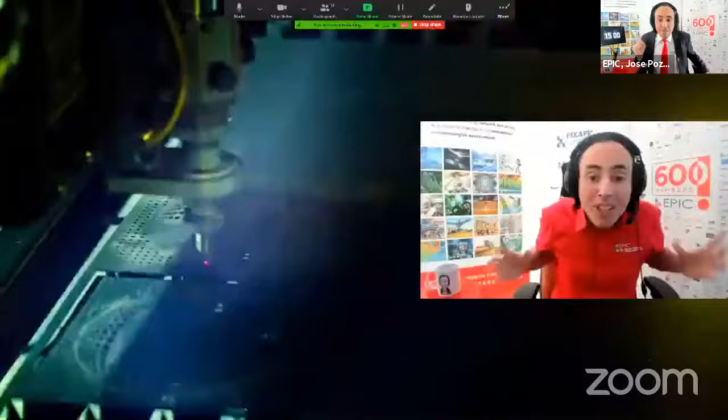Wow, that's the only way to describe why ultrafast lasers are getting such huge traction across a growing number of important applications. An initial boom in biotechnology and micromachining caught the eye of the full industry. Now femtosecond, picosecond, and nanosecond lasers are established as stable, mature, and reliable, offering high quality and quantity.

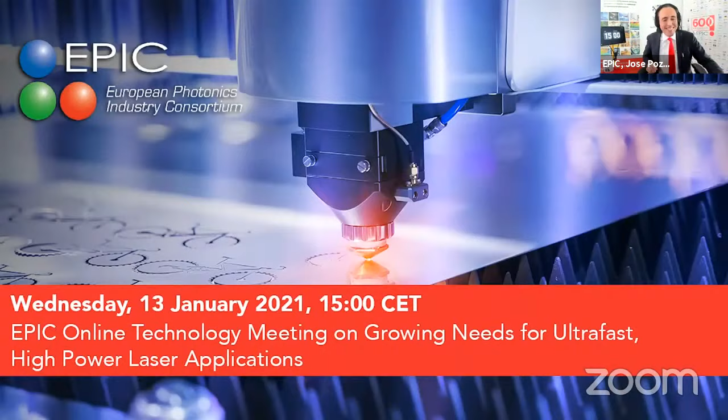But this meeting is not a technology push. I want to hear about real-world applications. My VIP list on January 13th looks like the credits on an epic motion picture.

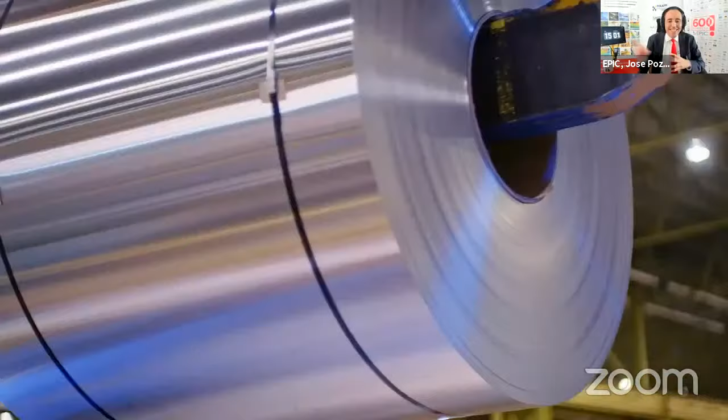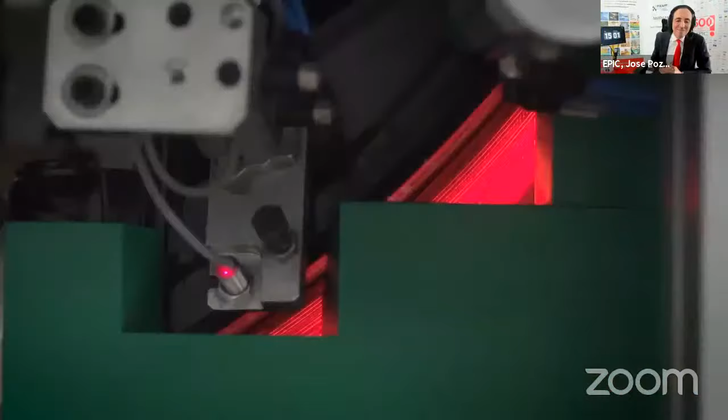Look at the big players like the Finnish Outokumpu, the masters of stainless steel. Others like Marelli are making and delivering next generation automotive lighting. And I'm sure that, like me, you are curious about what famous names like Ferrari, Maserati, or Lamborghini are doing in the field of advanced laser manufacturing.

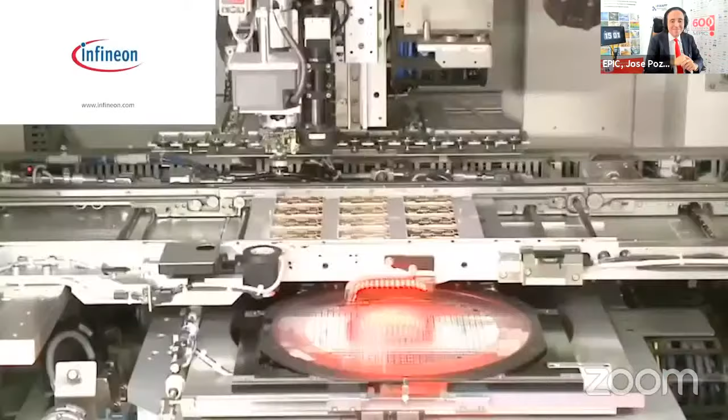What about semiconductor companies like Infineon, consumer goods manufacturers like Bosch or Huawei, leading optics companies like Leica or Zeiss? They all need and want customized ultrafast lasers. So let's discover the pulse duration, frequency, and beam shape specifications that match their needs.

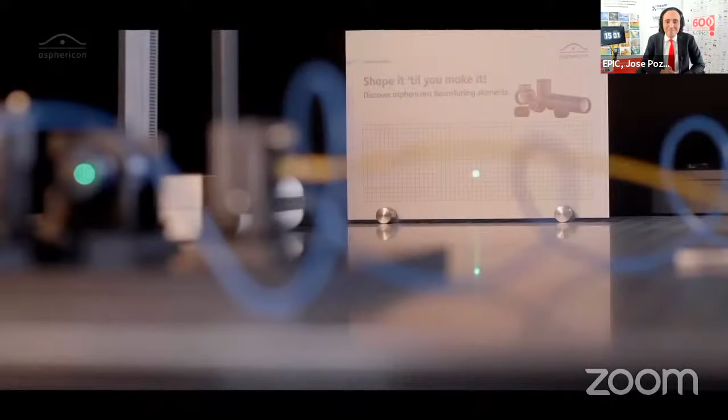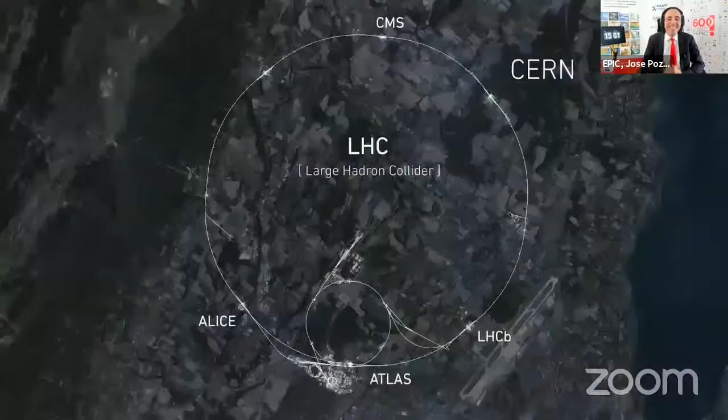And looking beyond material processing, remember the Large Hadron Collider at CERN depends on femtosecond lasers to maintain synchronization across the entire macro system. So plenty of reasons to put Wednesday, January 13th, 2021 at the top of your New Year agenda. Join in the conversations with leading experts.

Now, we want to use laser to apply a texture on the surface. We have been looking together with the University of Twente in the Netherlands on creating these kind of dimple patterns

on zinc-coated steel using nanosecond and picosecond lasers. In the next step, we have also looked with one of you on larger size samples, such that we can really demonstrate internally, but also to other people, the functional surface properties which we can realize by using this technology.

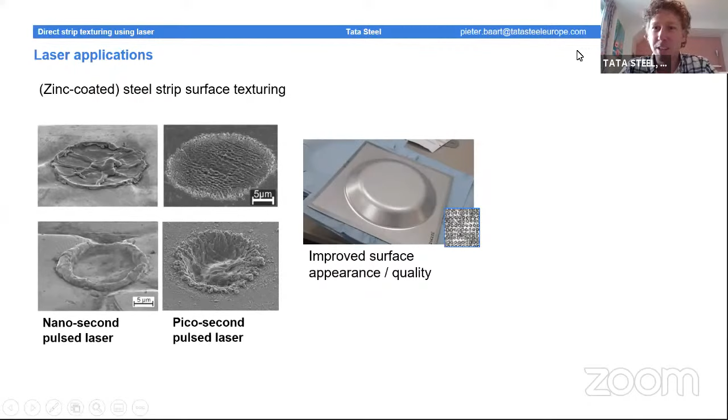And then in the next step, we have also done some tests where we created tailored surface textures, as we call it, where you don't texture the whole steel plate with the same type of texture, but you can really optimize locally to, for example, drawing process customers.

So this is all great, but how do we do it today? Maybe it's good to give you an idea of the starting point.

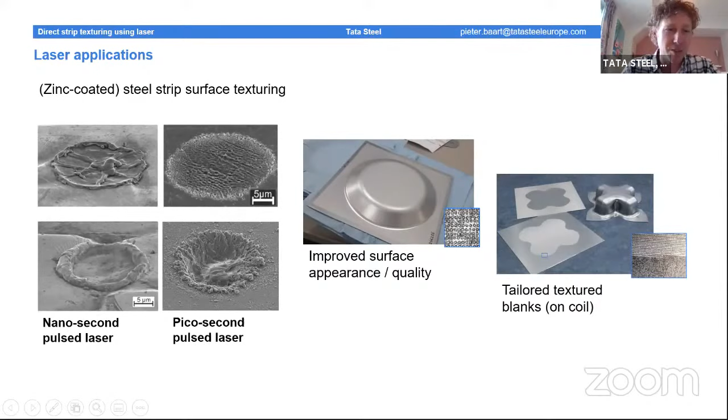In this production line, there are a few steps. There is a heat treatment section, there is a galvanizing section, and there is a surface finishing section, which mainly consists of the temper mill. And this is what I want to look into.

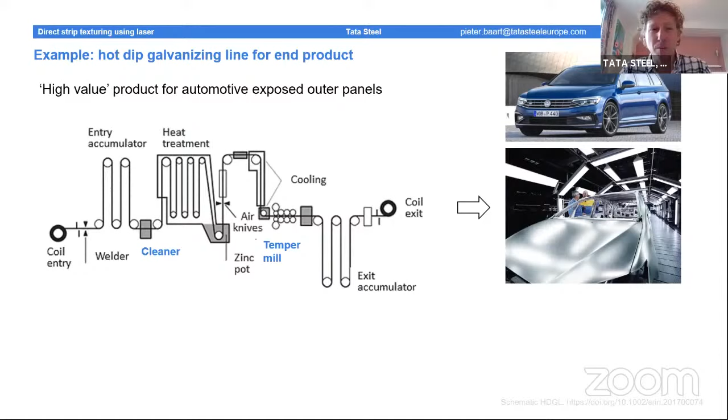This temper mill, which we use today, has a number of objectives. First of all, to improve the mechanical properties of the steel itself. It does some shape control, but for us most important, it creates the strip surface texture. So it basically copies and presses it into the steel strip, which is flying through at a speed of 2.5 meters per second.

My ambition is to realize a process where we split the mill step for the mechanical properties and the surface texturing by doing that with laser. So this is not something we can do today.

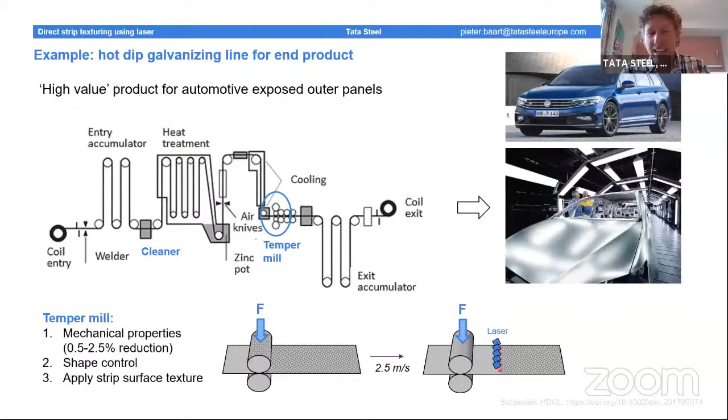This is quite challenging. I have identified a number of challenges which I want to share with you. That includes, first of all, the process speed itself. If you look at the beam delivery, the beam which is scanning over the surface, depending on the pulse duration we use, we are limited in the beam velocity.

At the moment, I'm mainly looking at nanosecond pulse duration. And then you have to remember the speed at which the strip is also going is quite substantial, 2.5 meters per second. So that means with one single laser beam, you will see a kind of drift in the surface, and you really need a number of laser beams to create a full coverage of the surface at these kind of beam speeds.

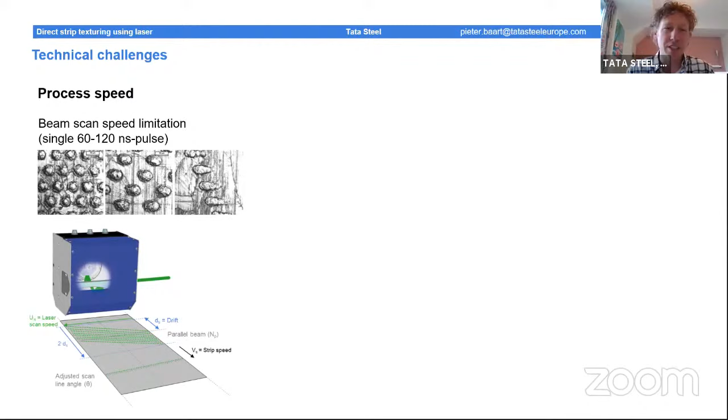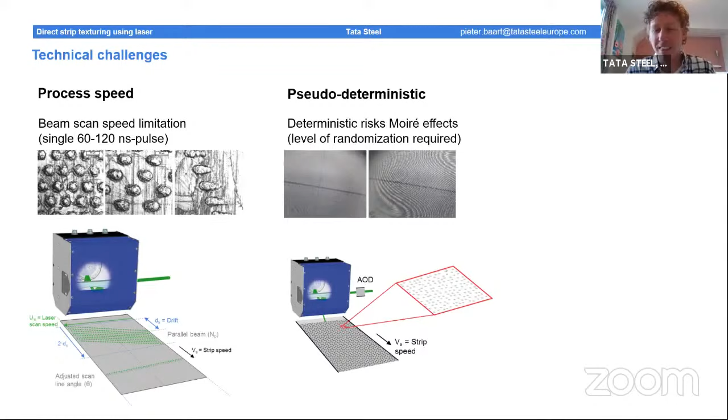And then the most challenging thing will definitely be the system integration. I have done some calculations on what we need to apply this technology in our hot dip galvanizing line. Well, we need about 380 kilowatt pulse laser output power. That's amazing. At the same time, we need 2,000 to 3,000 parallel laser beams to cover the top and bottom side of the steel strip, which is about 1.5 to 2 meters wide, moving at a velocity of 2.5 meters per second. So that's really an ambitious target, which we definitely cannot do in one step.

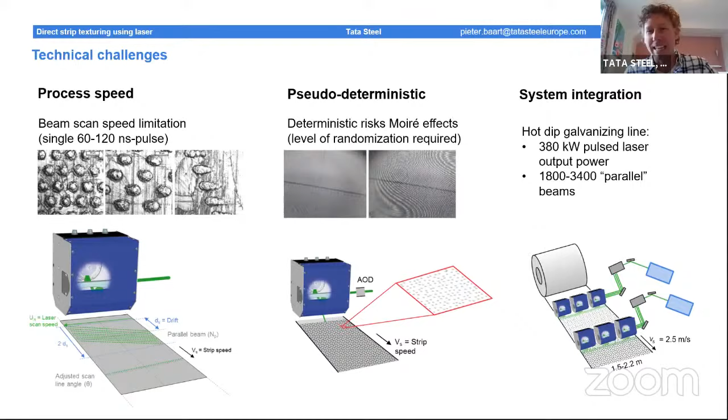So that's why I created a kind of roadmap.

Today we are in a situation where, in a lab environment, we have realized strip properties. We have looked at the feasibility, where the state of the technology is now, and what steps are required to go to hot dip galvanizing line type applications. But in the short term, I see a kind of single blank approach.

So we have a kind of batch production technology where we have square meters on which we can apply texture, locally optimized textures to support the deep drawing processes of our customers as well. And then in the medium term, we can do this in a continuous process, in a full coil, but at a rather low speed, with a dedicated line to do this.

And then in the long term, we get back to our hot dip galvanizing line speed of meters per second. So we need to process about 4 square meters of strip per second with the laser. But that will definitely not be today, not tomorrow. It will take a couple of years, and I really hope you can support me in realizing this. So that's what I wanted to show to you today.

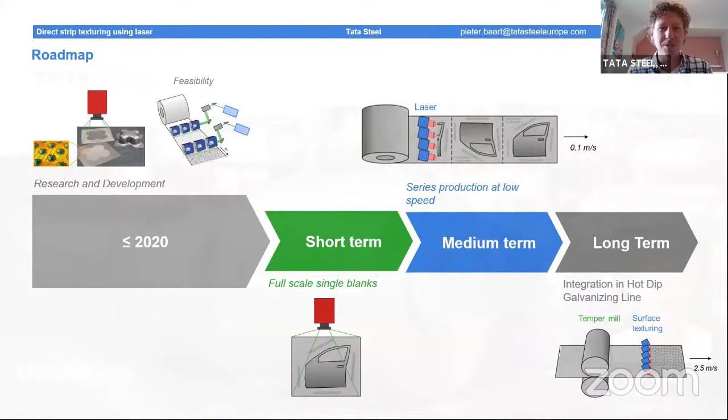Thanks a lot, Pieter, thanks for being here today and bringing your wish list. When we had our first discussion, I was saying, wow, this is really a wish list, a special one for EPIC members, not so present here. It's really nice to look at the future. So Pieter today really presented something that can't be done today, but maybe in a while. So everyone, think about it.

If there are questions for Pieter - you mentioned it a bit already, you didn't summarize it all together, but basically we always ask what can you do for them and what can they do for you. You are looking for something on large surfaces, many beams, high power. You mentioned the nanosecond laser, we had a chat about it, it could also be picosecond, but that would be even more demanding. If someone wants to comment, feel free.

I see a hand raised already by NTS Optel. If you can ask your question live, switch on your microphone. Hi Pieter, it's Frank. What can the laser do, in your opinion, that you cannot do today? You have that roller already, so why do you want to switch to this huge laser system? The benefit is not clear to me.

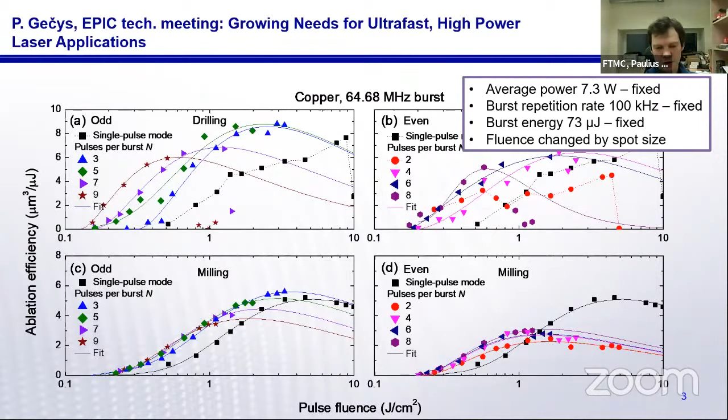What's most important is that if you work in this optimized regime at an optimal fluence level, you have the highest efficiency, meaning the highest material removal rate in cubic millimeters per joule per minute per watt, and also the highest surface quality. This is really important, and our lab spends a lot of time researching these mechanisms.

Here are some efficiencies we reached for copper and stainless steel. For crater drilling, some efficiencies are higher compared to milling of cavities. For example, the highest efficiency we reached today was 8.8 cubic micrometers per microjoule for copper drilling in a megahertz burst with 3 pulses.

In the case of copper cavity milling, we reached a bit lower efficiencies, but they are still higher compared to single pulse conventional milling. What I can say is these milling efficiencies are world record top efficiencies, because we tried to optimize these burst regimes together with fluence optimization, giving the best possible results.

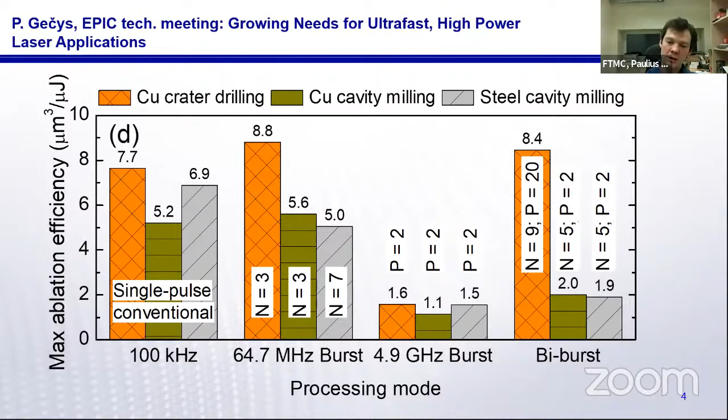So we apply this. You see some pictures of our milled features in copper and stainless steel, fine features, which is what our lab is developing. If you need process development or some advice, you can always contact me. Thank you.

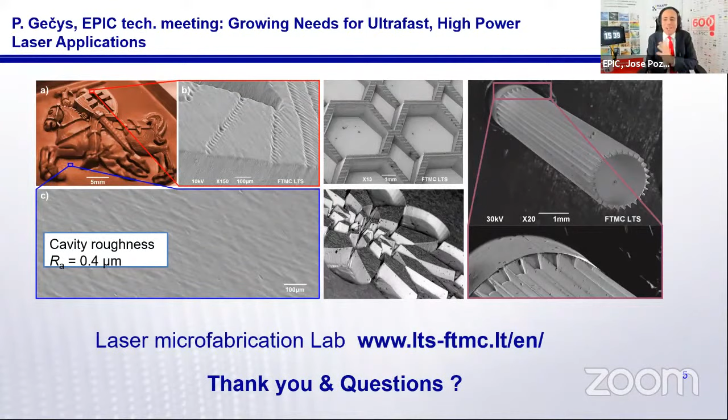Thank you very much, Paulius. Thank you for being in this meeting. I have actually seen the Laser Microfabrication Lab in Vilnius when I was traveling 200 days a year, and I loved it. It's an experience that I recommend to everyone. Paulius, this is an epic meeting, and you know what that means: there are 650 companies that want to work with you.

What can you do for them, and what can they do for you? What collaboration opportunities do you expect after this? Yeah, so actually we do process development.

So if you have some applications where you need to test, we have lasers, we have our instruments. We can do some R&D research for you if you are interested in such things.

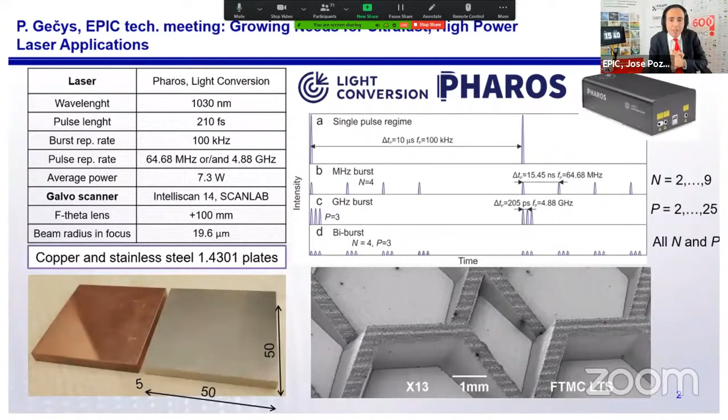Paulius, you mentioned some interesting lasers from Light Conversion, which I'm actually a fan of, and I would like to also give them a shout out. Really great femtosecond laser regime. I want to ask you about laser pulse characterization. There are many femtosecond laser companies today in the room and others, and we want to compare apples with apples. How do you currently measure the pulse shape?

We are more like a laser application lab. So you know, the characterization magic is for the laser manufacturer.

You know the magic of these meetings? I have everyone in the room, so I can go to APE. Do I have anybody from APE? These fantastic autocorrelators. When I do this, everybody knows APE. Mateusz, Ibek from APE, how are you doing this afternoon? Thank you. Yes, I think here you are.

I am very interested in knowing if there is a standard process to characterize the pulse shape in these femtosecond lasers. I know APE has developed the autocorrelator that everybody is using, and I love using it. How do you address this challenge? I think the most common and most used method is autocorrelation. We get roughly the pulse duration of a pulse. There are more sophisticated methods such as FROG or SPIDER, where you can really measure the real pulse duration. And I think those are the most common methods used in R&D or in monitoring of laser pulses.

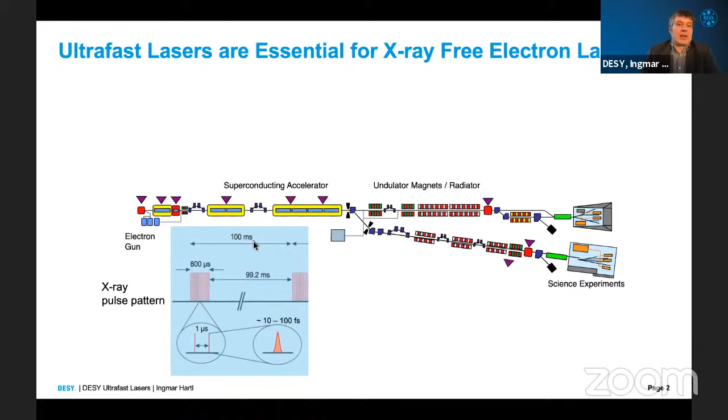We need UV lasers for generating the electrons. We need to modulate these lasers, and we need tunable UV lasers to modulate them again, to seed them. We need very flexible lasers which we need to reconfigure for every user, from the VUV to the terahertz, for pump probe experiments which are femtosecond timed to the X-rays.

So we have a huge timing distribution system on length stabilized fibers, which does precise femtosecond level timing of all these lasers to the X-rays.

Our facility runs 24/7, so we need high reliability. We typically have more than 99% availability of all lasers during the more than 6,000 hours we run per year. We have up to 5 kilowatt in these burst laser systems driving the conversions.

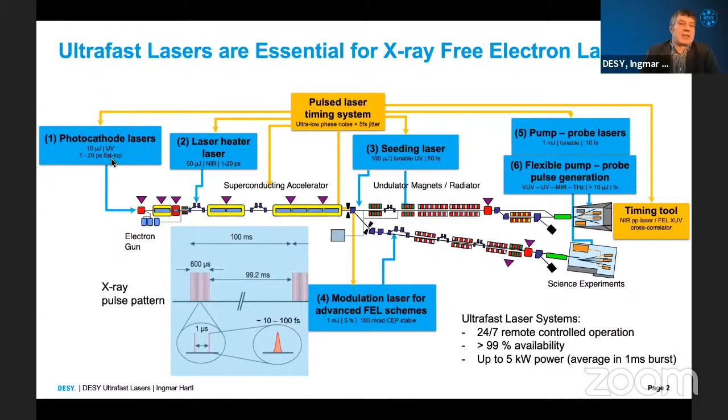I just want to show you one example, because that's why I came to this meeting. For this photocathode laser, we need flat top pulses, and we use industrial wave shapers to generate this.

What I show here at the bottom is we're also working on next generation accelerators. These are laser-driven accelerators, for which we need kilohertz rep-rate lasers with a few joules and a few tens of femtoseconds - kilowatt level, few joule laser sources. We currently have a huge program developing these lasers.

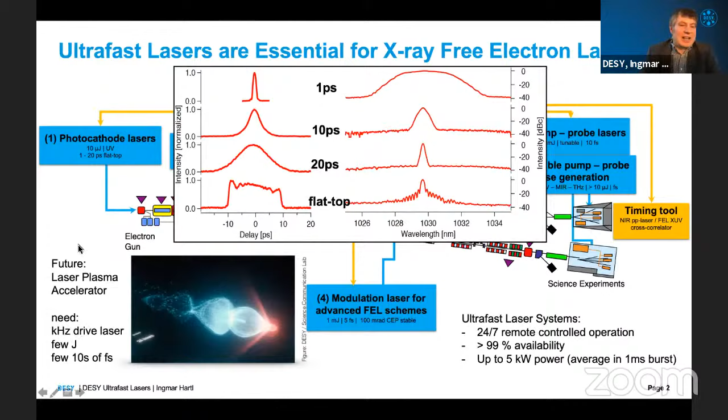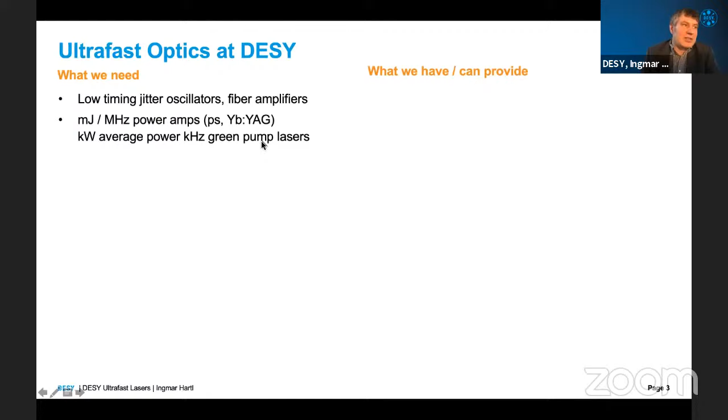So next slide is the epic question: what do we need? What do we have? We need oscillators, fiber amplifiers, ytterbium YAG, but also 2 micron and kilowatt average green pump lasers for electron acceleration, wavelength conversion schemes, PM fibers, fiber components, fiber Bragg gratings, pulse shaping technology - not only temporal but also spatial - drift stabilization for drifts in energy, pointing, timing, you name it. We need to be very precise.

We need to have high damage threshold optics, which are typically dispersion engineered, typically in vacuum, which makes it even harder, and mainly for our lasers in the NIR. But our main problem are UV and mid-infrared coatings, which are hard to get. We need high damage threshold components, and isolators and shutters are a huge problem.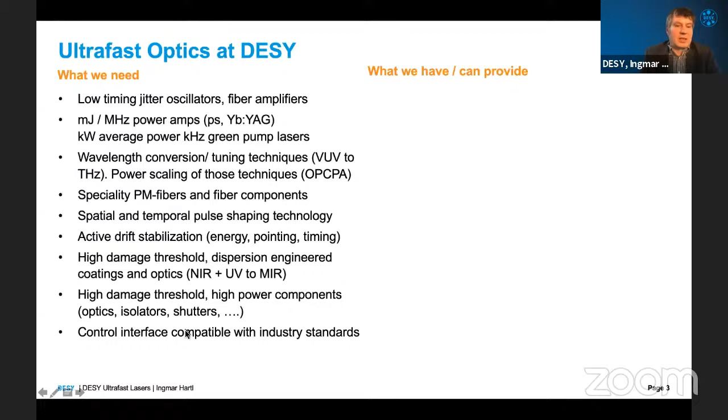We need control interfaces compatible with industry standards. We run remote controlled 24/7, so it's very important that our control software can interface to lasers and all diagnostics. We need high uptime, so we need to have maintenance by in-house staff and diagnostics.

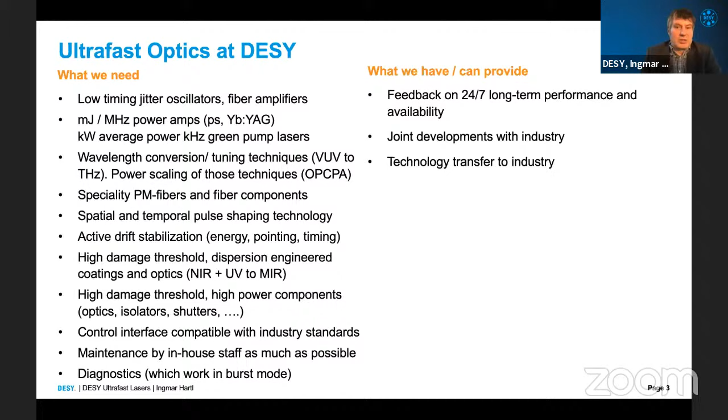So what can we provide? We can give you feedback on how the lasers are doing. We can jointly develop things - if we can't buy it, we develop our own stuff. Technology transfer to industry can be done, and we can provide you with excellent staff. For example, Francesca was at DESY, right? So we have super people here who are looking for jobs, and they have hands-on experience.

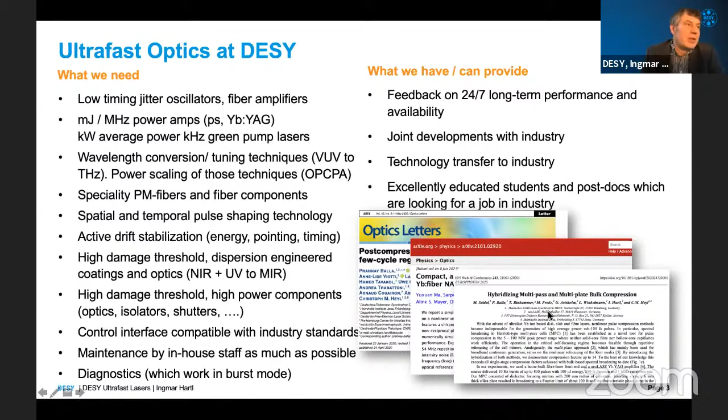I'll show you a few examples. We developed pulse compression schemes. We developed recently low noise oscillators - this is a joint project with a company, Neolase, where we did a new compression technique for picosecond lasers. And we have lots of electronics, and we have precisely timed laser systems. And for this, we have even an industry collaboration lab.

Plus, we have spin-offs. There are two laser companies founded by DESY people, which are on DESY campus and trying to sell this. This was technology developed at DESY coming out of these accelerator-driven things.

And I want to give you an outlook. The city of Hamburg is basically improving this entire area where we are located, so we will have more science, more industry, and more spin-offs here in Hamburg. Thanks.

So I guess Jose is close to cry - such a shopping list is like a dream for an EPIC meeting. So thanks really a lot for this presentation, and also for naming myself as ex-DESY. So thank you, now I don't know where to start.

I see some hands raised, some questions I want to ask. I don't know, so let's start with just laser components - I know that we have a slide there, and she wants to talk about what can be done with optics for high power lasers, right?

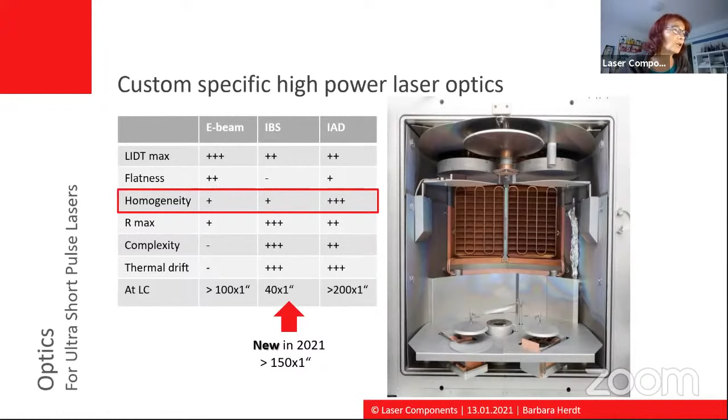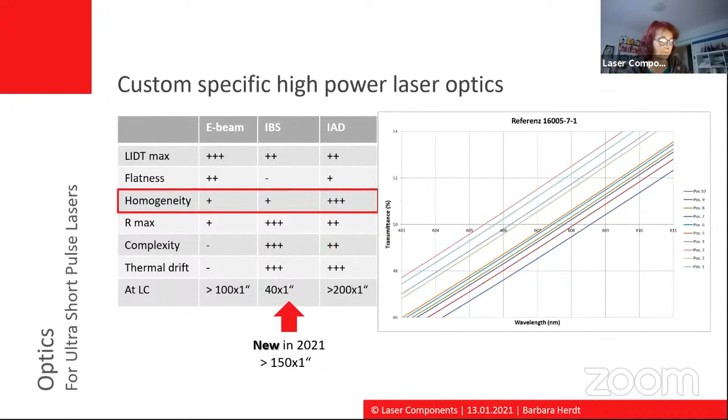So this is the chamber that we have bought, and it's specifically made to have good homogeneity, because that's another topic, to get good homogeneity on large optics. And so how do we measure it? We do a special coating on the filter, and we look specifically at the slope here and see that we get, for example, less than 1% in differences. So this is really something we developed for this customer, for this petawatt laser application, and we delivered many optics now, and I think we are very open for new projects, and this is what we can do for you.

Very good, thanks a lot. So I guess we have to move on because we have so many questions. I know that Ralf from Finisar doesn't have only a question, but he can show you what he did for Ingmar, and this can also be done for you as well, right? So Finisar are now II-VI. Ralph, maybe you can share your screen. Now we can - so this one, we remove this one. And now Ralph, are you there? Yes, I see you, welcome. So you are already a big buddy of Ingmar, right? Let's find you some new friends here as well.

Yes, thank you very much for giving me the chance to quickly talk about our activities. I would like to pick up on the WaveShaper, which Ingmar has mentioned. So the II-VI WaveShaper is a programmable optical filter. It comes in a benchtop box like this, or also in a module which you can integrate in laser systems. The type of applications we follow with this wave shaper include shaping of femto and picosecond pulses, shaping pulses in the time domain.

So we can do, for example, pulse compression, pulse stretching. We can create special pulses like double pulses or rectangular pulses. Other applications are spectral broadening of a laser line by applying an M-shaped filter, and also we can create wavelength tunable pulsed lasers. So these types of applications can be addressed with this programmable filter, which is based on liquid crystal technology - it's a spatial light modulator. That technology is broadly used in telecom applications.

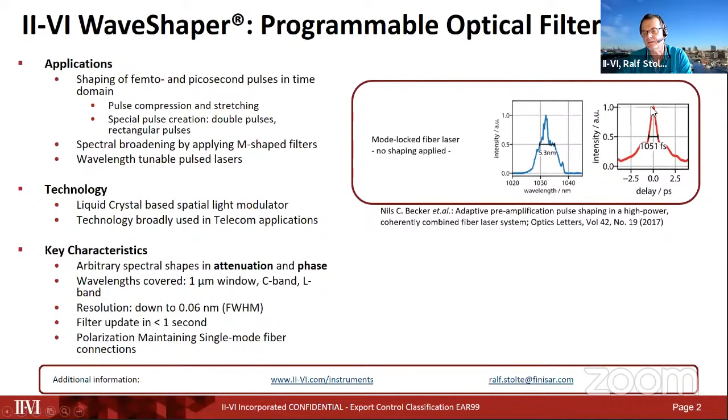So now to give you a better idea what you can achieve, I have an example here. This example shows the spectrum of a mode-locked fiber laser where we do not apply our shaping, no filtering applied. This mode-locked fiber laser has a pulse length of about 1 picosecond. Now with applying the proper filtering with the wave shaper, we first apply an M-shaped filter so that we suppress this single narrow peak, so that in total we get a wider spectrum of 8 nanometers instead of 5 nanometers. We also apply some phase function - this green phase function causes a flattening of the phase. As a result, we get a very clean pulse of only 300 femtoseconds instead of 1000 femtoseconds.

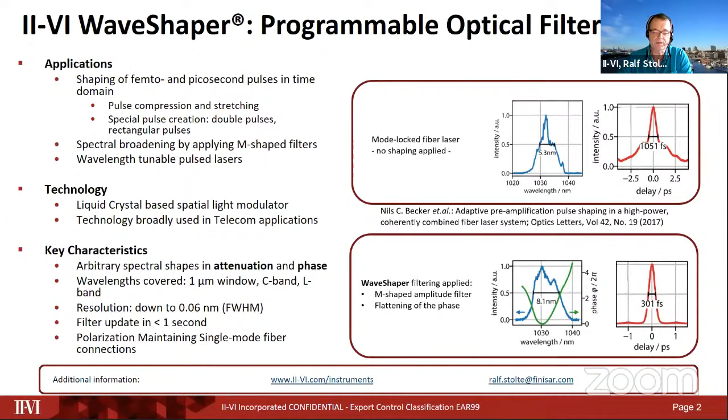So this is just one example. This is programmable from any computing environment, so you can just run your own filter shapes the way you like.

Very good, Ralph. I was muted. Sorry, sometimes I make that mistake too. Thanks a lot, Ralf, for this, his example is always helping. So if you get a 3 times better pulse, of course, that's the right place to put your WaveShaper.

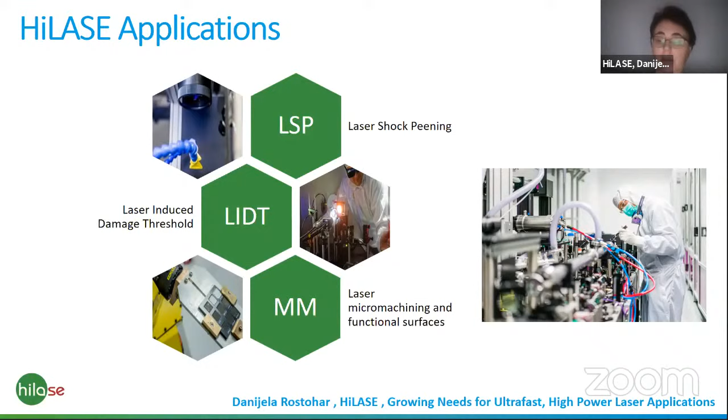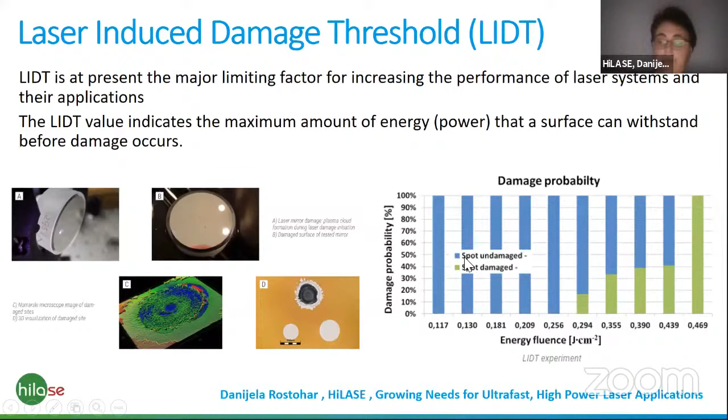Damage of the optics is given by the so-called LIDT value. Basically, you will get some kind of graph showing the damage probability for certain fluence. And we say that we are safe in this blue region. But if we go a little bit more back to the physics, fluence is related between energy per pulse and spot size. That means you can basically work in two regimes to get the same fluence: by low energy per pulse and small spot, or high energy per pulse and big spot.

That means if you are looking for optics and somebody tests your optics in this first regime, and you're going to use it in another regime, like the second one, you will see a huge difference. Your optics is going to be damaged at much lower fluencies. That means it's very important that you do testing in this second regime.

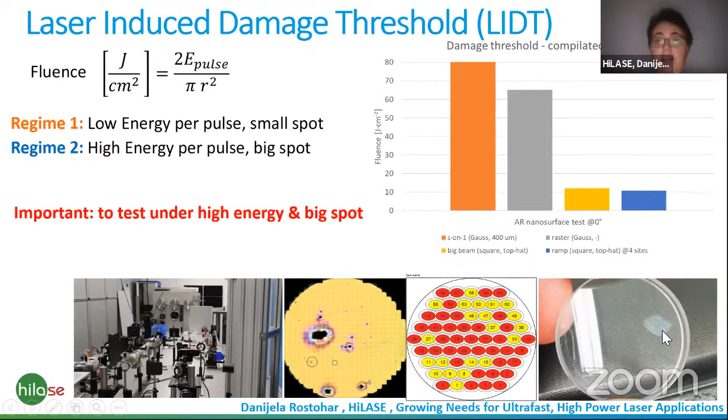Down here you have just a few pictures. This is our setup, this is how the testing usually looks, and some surprise, you see the damage on your optics, which was tested and supposed to work for you.

And coming to the favorite question, what can we do? In order to test our optics, we started LIDT, and now we can offer it as a service as well. That means we can do standard ISO testing on different sizes of samples, up to 1.5 kilos in weight. We also test in different conditions - I saw that today was interesting in the vacuum. We also very soon will have testing in cryo temperatures.

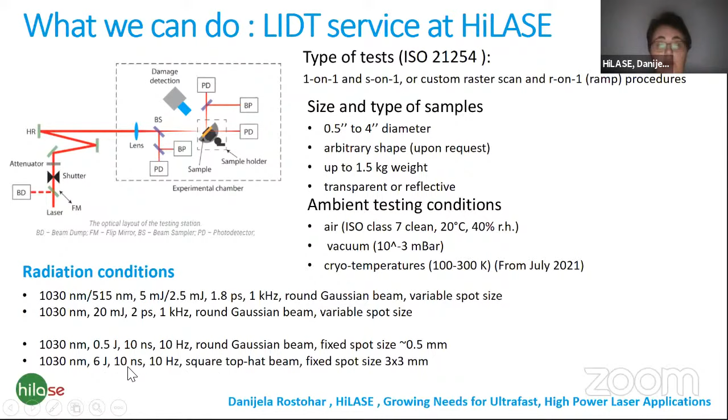And the second question, what you can do for us - helping us reduce the cost in optics and coatings, and also helping us reduce the waste of time. That means you can jointly work with us in understanding which kind of defects are influencing LIDT. Then also jointly develop new coatings and do analysis, and of course test your optics in these specific kinds of regimes.

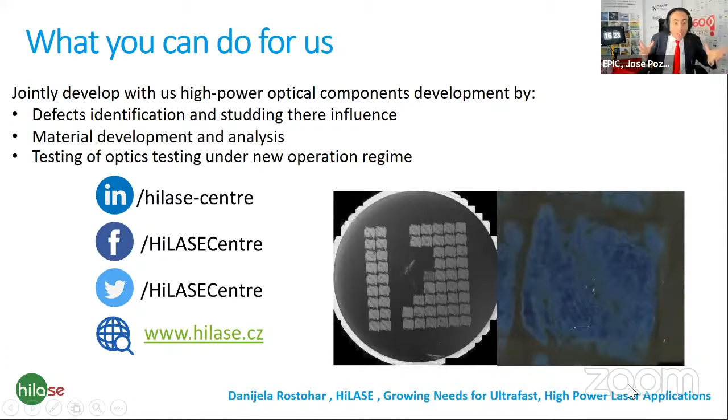Thank you very much, Danijela, for once again a great presentation and also always looking to collaborate. I have to say that so many companies are following up on different introductions that we are making to HiLASE, and I keep getting great feedback from collaborating with HiLASE. So congratulations on the great job that you are doing.

I would like to ask always companies who can interact with HiLASE when it comes to measuring the LIDT. So let's go to a company in the optics domain. Let me think, Asphericon. Do we have anybody from Asphericon? I think we do.

Sabrina, I don't think I met you before, but Sabrina, thank you very much for being at this meeting. One question - we are talking here about potential collaboration for the measurement of the laser-induced damage threshold. How does Asphericon deal with this? And is there perhaps some room for cooperation?

I already put a note down for myself that this is something so important, and it's always recalled from customers that they want to know exactly the laser damage threshold. We don't measure this in-house because we don't have the option to measure this. We don't have all the lasers, but we can do optics for high power laser applications, and we can do coatings.

And I already put a note down, Danijela, that my coworker who would be responsible for your territory should get in contact with you again, so that we can find a good way of cooperation, because you offered that you can do the laser damage thresholds as well. So we could do a cooperation in that way, that you do the laser damage threshold measurements and we do the coatings and do the optic developments.

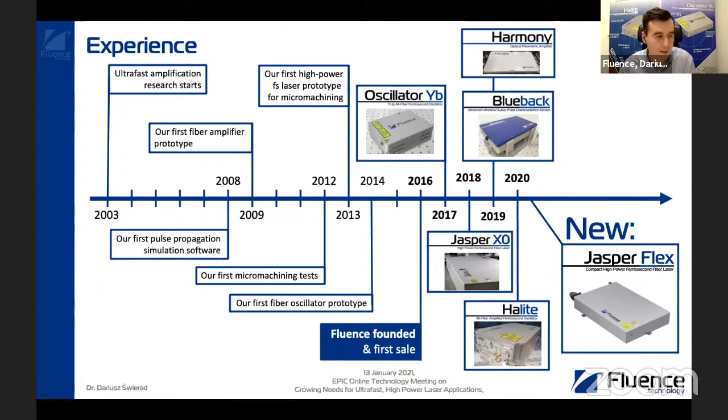So just to give you a rough idea what Fluence does: we are a company from Warsaw, Poland, founded about 5 years ago. We base our work on long experience from Polish academic institutions developing lasers.

So we developed lasers basically from 2003, so it's already a pretty long time, and it helped us construct these nice all-fiber lasers with very good parameters that are reliable and have very good optical parameters. We focus on 1030 nanometers, with a range of products from very small seeders of 20 milliwatts up to lasers like Jasper, which goes up to 60 watts. I think this is the most interesting laser to talk about, as everyone here loves high powers, which is great because we can provide high powers at femtoseconds, not as high as kilowatts, but still amazing for femtosecond lasers and fiber lasers.

So just to introduce, Jasper laser is a fiber construction developed on a very special oscillator where we don't use SESAM, and as much as possible is confined inside the fiber, which means you can get very good pulse stability and very good pulse quality.

Of course, this led us not only to provide laser power at 1030, but we can also generate second, third, and fourth harmonic, which are more and more popular in micromachining nowadays.

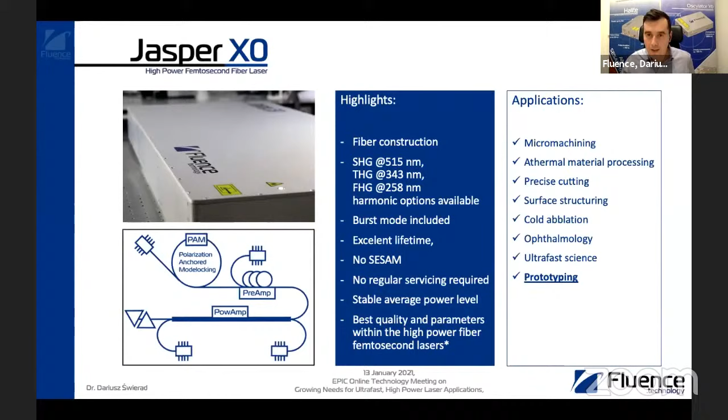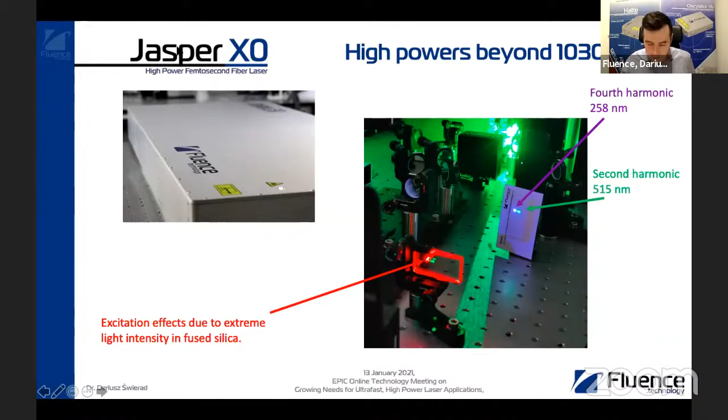This is one picture for what we can do. Here you can see we have fourth harmonic and second harmonic generated. But also a very nice effect you can see in this piece of silica in the bottom left corner shows that we have very nice high light intensities that generate these excitation effects, which means we can reach very, very high peak powers.

Just to show you what nice things we can do apart from what we offer, we built this laser that goes up to 100 watts. I understand this is not a lot for people who deal with kilowatt lasers and higher, but talking about a fiber laser with very high tunable repetition rate, very good M², very good Strehl ratio, this is really amazing, especially that we obtain 200 femtoseconds at the laser output.

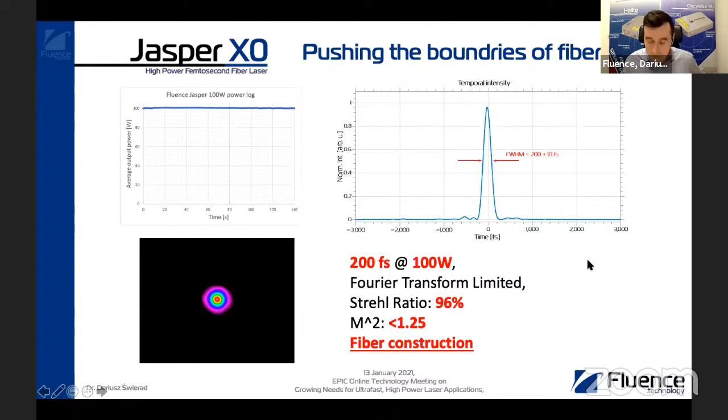Of course, having this kind of lasers, we also run an application lab in Warsaw where we could check different applications like super hydrophobic structures, material processing, glass cutting, and more interesting applications that we are happy to test. So this is actually the answer to the question what EPIC members can do for us.

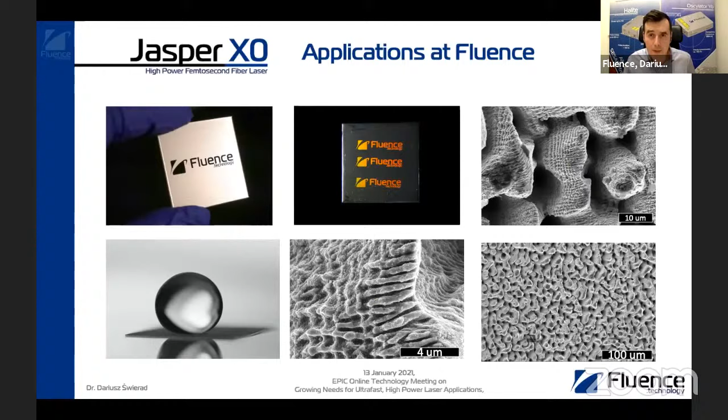So we are still looking for new applications. We are looking for partners who want to collaborate and who want to not only test our lasers, but who have nice ideas of how these high power femtosecond lasers can be used. And we can provide some help in this field, especially that we are now opening a new application lab in Wrocław, the southwest of Poland, where we will have very nice equipment and a dedicated team to run this kind of applications. So thank you very much.

That was, I hope, quick enough, so we have time for questions. Yes, it was enough, and it was really nice as usual. Dariusz, thanks a lot. So yeah, it's true. We have many questions today. Did you see it? Yesterday I heard three times a question like, how do you feel about two hours with only short six minute talks like we see today.

So you said you have your shopping list. You proposed it a bit ideally, so you don't really have a shopping list. So you ask for applications. Can you maybe tell what is the sector? Where is it that you would like to investigate a bit more? Where is the use for a high fluence laser?

Applications are mainly in micromachining, so in laser processing in general. Having these high power lasers nowadays, what is important is that having this much power and energy in a single pulse is actually too much for most applications, because the optimal fluence for most materials is low enough that you only require between 3 and 11 microjoules. So it is necessary to find a way of splitting this power, of reorganizing the way we do micromachining. One solution is to use beam shaping, like Marshall just said before me, and do larger areas at one time. The second thing is using higher repetition rates, so you have more pulses in the same time, and then using very fast, for example, polygon scanners to increase the process speeds. These are areas we are for sure very much interested in looking into.

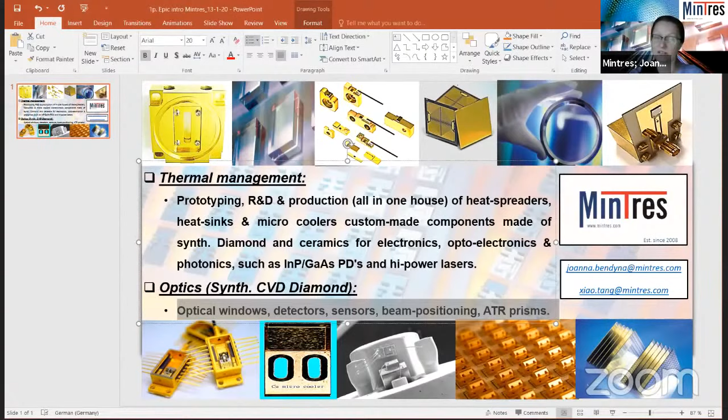I must say we do have a few special solutions, but of course life is always complicated, so we're still working on advancing in that. We're always looking for additional partners to get even better with our different prototypes or production lines. So just a brief overview, more related to today's topic: we have several business lines, and one of our stories is thermal management. In the case of high power lasers, we specifically focus on the overheated parts - heat sources and hotspots.

Typically everybody has a different design, so we usually start with some prototyping, maybe R&D. If the solution is interesting, we are capable of producing those components. These are always custom-made, because the designs vary so significantly - many solutions can have similarities, but they always have to be reiterated. What we do are heat spreaders, heat sinks, could be micro coolers, all based on ceramics or synthetic diamond. I hope most of you already know diamond is the most efficient in removing heat. There are also cheaper options - aluminum nitride, for instance, is one of our top choices.

I'd also like to mention, which could be interesting for quite a few in the audience, optics. We specialize in diamond optics - optical windows, detectors, sensors, beam positioning, especially in synchrotron radiation and infrared applications. We're quite diverse, and we've existed for 13 years, but our key people have life experience of 30 years plus in these subjects. So if anybody has questions or troubles, our team has probably already dealt with that before. Thank you so much for allowing me to share a little bit on Mintres.

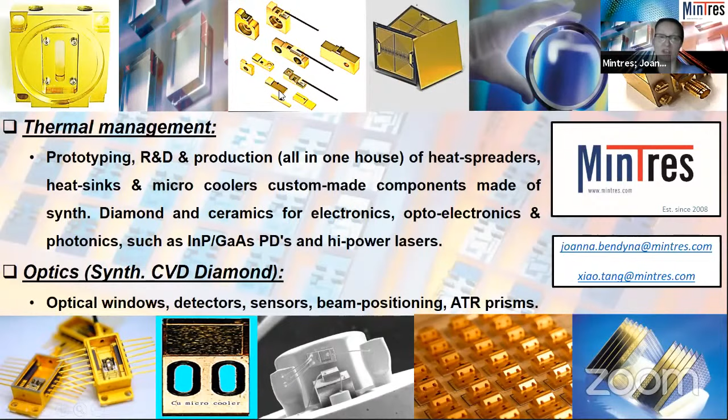Of course, Joanna, we are here for you also in this way. Thank you very much for presenting and for joining EPIC very recently. So very welcome, and we look forward to connecting you with many possible collaborators and customers for new projects. If I don't see further questions - I know we'd have many in the chat, and you were really amazing today - let's move to the next speaker and keep a few minutes afterwards for a bigger discussion with you and others who haven't spoken yet. Now we give the floor to Joachim from Pulsar Photonics.

We met him already earlier in the meeting, and now he'll show us what his company is doing in Aachen. Hello everyone, hello Joachim, are you still there? Very good, yeah, I see you. There you are - there are so many people, I have to catch where you're showing up. Please share your screen, the floor is yours.

Thank you very much for the introduction. Do you see my screen? Do you hear me? Yes, but we see the wrong one. Oh no, you're not yet in presentation mode. Now, perfect, there you go. Thank you. Okay, you're welcome.

Hello everyone. First, let me introduce our company. Our company, Pulsar Photonics, is focused on ultrafast laser micromachining, so this topic is quite good for us.

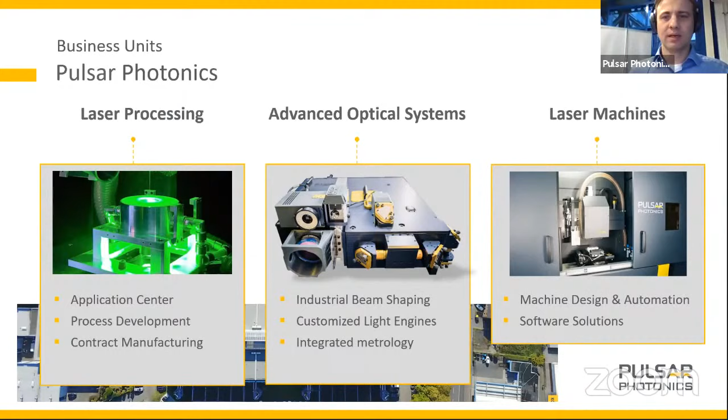And of course, that has to be set up in the machine. Now I'd like to give you a small overview of the applications that we are busy with.

So of course it's tooling. The tools are becoming bigger and bigger, and they need more laser power. If you think about hardened coatings, we have to do a lot with friction reduction or with enhancing or tailored friction parts.

What we're doing is fine metal masks and sieves, very precise applications with tolerances down to a few microns. Security markings - here you can see one application that we did together with IWS with Tim in Dresden, where we are familiar with adapting also optical systems that are not developed by us.

Glass processing is a small part, not our main focus. It's more about filter devices, electronics, and ceramic production. As the parts are becoming larger and larger, we need a lot more laser power.

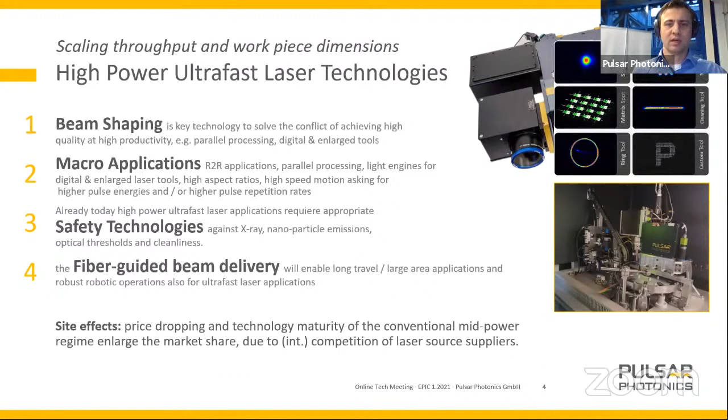Here you can see a system that will be delivered. It's more than 150 watts on average. That is actually the high power range in laser material processing.

I know that there is much more available, but actually we are dealing with 100 watts plus to put that in the material microprocessing. We need high laser pulse energies to enable the beam splitting, but also if we think about drilling of larger material thicknesses to process materials with high aspect ratios, we need pulse energies in the range of several hundred microjoules or millijoules. High speed motion is also asking for higher pulse frequencies, and at the end, high average powers.

The third one is a very specific topic, I guess actually a national German topic. We have strong regulations regarding X-ray protection and also nanoparticle emissions. These X-ray emissions come out if you exceed specific fluence on the workpiece, and you easily run into that if you use femtoseconds, but also high power picoseconds with small focal diameter will lead to these X-ray emissions, and these are known as dangerous for the operators.

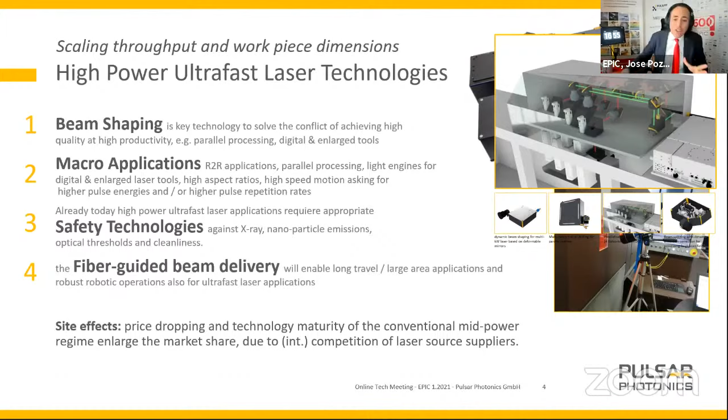By the way, I love Pulsar and I already owe you a visit, a long overdue visit. I want to come to visit you. But first, I want to find you potential partners.

So I'm going to go to France because I have a friend at Alphanov. Johan, yes, what did you have in mind for Pulsar Photonics?

I was impressed by what you presented, because you gave the big picture of where we are on ultra-fast technology. I have a particular focus on fiber-guided beam delivery. I would like to know your opinion as an integrator and machine manufacturer on the impact of this kind of technology - ultra-short pulse delivery by hollow core fibers, for example, from photonic tools - the impact on the price of the sources, and maybe a few comments on the maturity of the technology. What's your opinion on this and on its impact on the market? Because this is something we've been talking about for five years now, and it's still not on the market, and I would like to have your opinion.

Okay, maybe we start with the maturity and price, the last thing first. So we've been following this topic since the beginning, right? Because we come from the institute since 2007, 8, stuff like this. The price is dropping, yes, that's correct. But the laser sources themselves are not really cheaper, because of course the source itself comes.

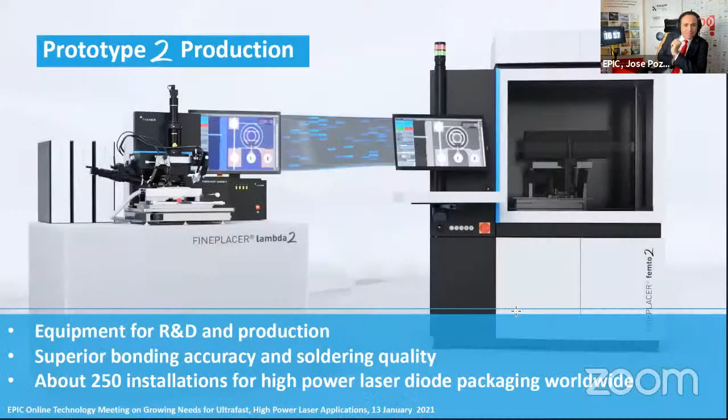Actually, I have seen that a lot of the companies that are there are using lasers, and we could help some of them if they are in the area of diode laser or laser diode packaging, or if they have some difficulties, or if they would like to start R&D programs on diode lasers. We could help them with process know-how, machines, toolings, or also with networking for such activities.

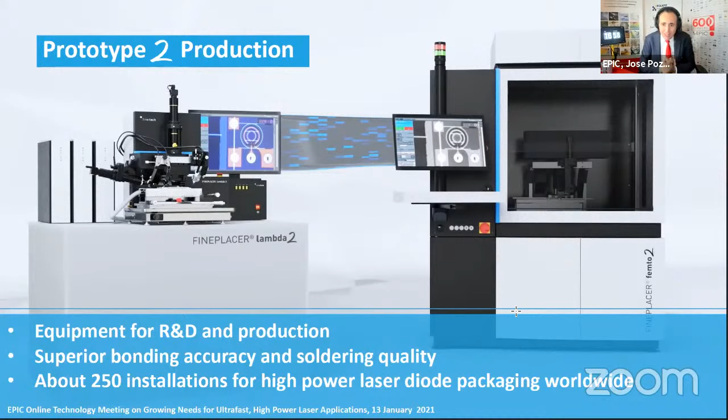I've seen your machine at work at the Prima group on the high volume passive alignment of the laser diodes, and it's super impressive the high speed assembly that you can achieve. It's an honor to have you on EPIC. As you see in the image I just shared on the screen, we go really from prototyping, from R&D phase, up to volume production.

Yes, and I want to go now from Berlin to Hannover, Rock City. I want to go to Valo Innovation, because it's one of the companies who has something fantastic in their hands. Oliver, we had a nice meeting. There's many companies here. You are in the lower power, ultra short pulse, 20 to 40 femtosecond. What opportunities for collaboration? What ideas do you have after this meeting?

Thanks for all the talks. Valo Innovation is just focusing on very short pulse, mainly at the moment in biophotonics, but also micromachining in the future. Could be a very good topic. The question for me would be if there's somebody who's interested in having really short pulses, that would be interesting.

We had a question in the group, in the chat, about the market. I do foresee the microscopy market to grow quite a bit in the coming years, and the ultra short pulses are something we are desperately looking at. But answering this, I want to give the final remark to IPG, because it's the market leader. So who am I to talk about market?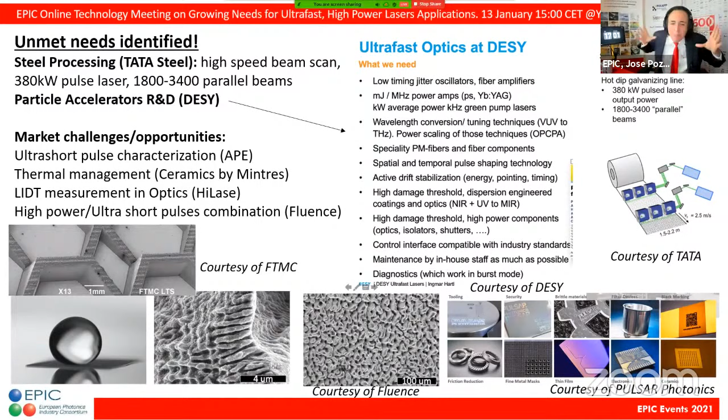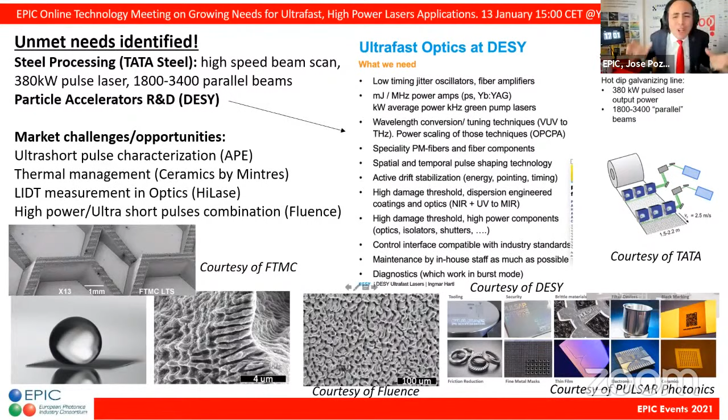It has been a truly great meeting. For me, the learnings are first: we got TATA Steel telling us about a huge challenge, and we got DESY with the most beautiful shopping list I have seen in a long time. We also have great room for cooperation with the ultra-short pulse characterization of APE, the ceramics from Mintres for thermal management, the laser-induced damage threshold measurement from HiLase, the high-power ultra-short pulse combination, and Goosebump generator for me, Fluence in Poland. It has been a truly great meeting, but it starts now with the cooperation, because at the end of the day, it is all about finding this room for cooperation.